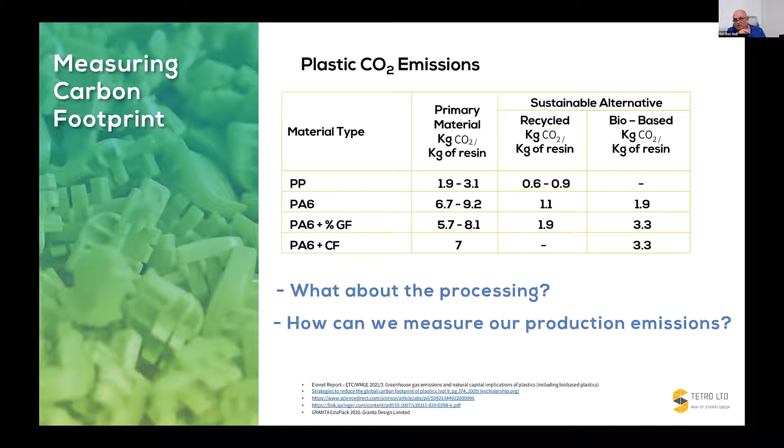How to measure the CO2 emission in our processing, how to understand, how to count, how to follow, how to compare. So all this is a very, very big challenge. And this is talking about data, data and analytics, without talking about decision making. This is a big topic to deal with.

So in general, each company needs to specify for itself the needs. Meaning, you cannot compare Tetro to another company, because Tetro is a vertically integrated company that makes everything in-house. But there are some companies that do plastic injection only. So these are different needs that a company needs to address.

And one of the good things about the real-time system that we are experiencing, which is done by Matics, is the system is open. When the system is open, you can create many features and many algorithms inside the system that can support your plan. So first of all, every company needs to specify the needs, and then consulting with Matics can build something which is more fit to the company.

So the challenge is about dealing with data. So if we talk about data, let's see what's involved in analyzing the carbon footprint. First of all, we need to connect machines to the system. Once we connect the machine to the system, we decide which signal, which data we can have in Matics, in the real-time system. And after that, we can also decide to use some energy meter, current meter in the machine, and take it also into the Matics system.

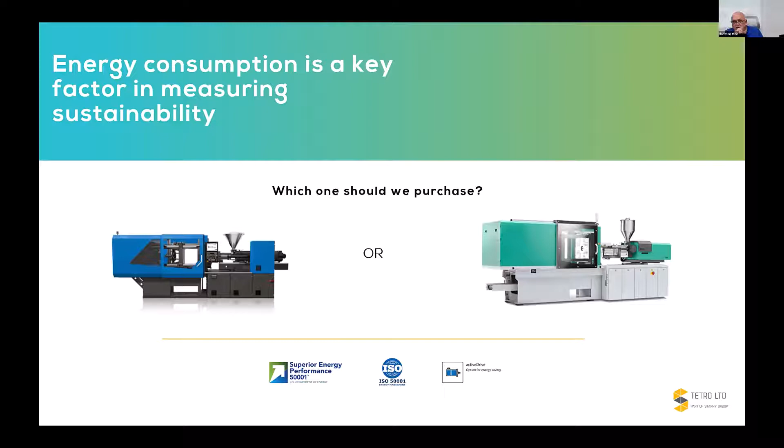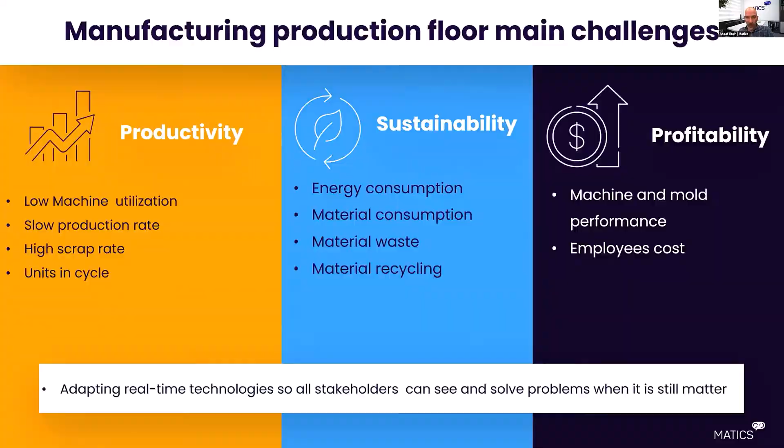Data is king, Ilan, of course, okay? The ones that are running with Excel, going with papers, they don't have the ability to track, they don't have the visibility, they don't have the ability to get insights in real time, and they don't have the ability to collaborate. And of course, call to action, being proactive, as Ilan mentioned, and this is key, okay, from reactive to proactive.

As for the challenge, we understand the challenges. The solution is to adapt real-time technologies so you can shorten the latency between an event occurring and the result. So event to visibility, step one, visibility to analysis, analysis to action, and action to result. And this one is by the Acatech Institute as well.

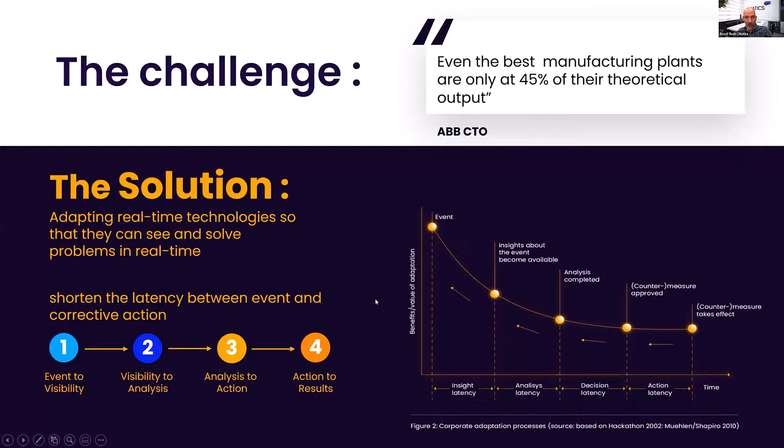Think about yourself as a manufacturer, where are you located, okay, in what stage? I can tell you that by meeting a lot of different organizations, most of them are somewhere between 1 to 3 and did not leap.

Typical use cases, as we know them, except OEE live management, which is very important. Everything needs to be in context, in the production journey. That means products and molds and the recipe and the ability to create a full digital twin that shows the real time, the real life on the production floor. Material management, energy management, quick response in terms of maintenance and remote management, collaboration. These are the most important use cases.

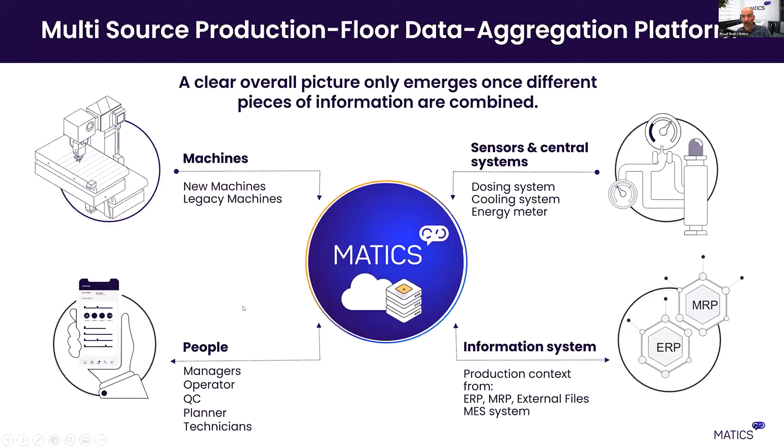So, of course, we've got information flowing from machines and from central systems and peripheral systems, and of course information systems and teams. They provide a lot of valuable information. So RTOI as a concept, okay, combines analytics with work management tools. We collect the data, we analyze the data, we visualize the data, we provide collaboration and personalized notification, and then we've got task management and process automation.

It's not enough to have data, not enough to be aware. You need to manage. You need to create a task, you need to follow, you need to create an automation that will say, okay, the task is created because something happened within the process, within the production process.

I'm gonna focus on work management tools in terms of call to action and automation. Of course, we agree that visibility 24/7 is key. You cannot do without it. And under the concept of winning the shift day in, day out, you need to go into the shift, understand where the shift goes, how the evolution of the shift looks like, and react to that. Just a few examples.

In work management tools, the first thing that we see which has great value is structured internal communication, replacing the instant messaging tool, which is not knowledge. It's instant messaging. You cannot work with it. It's not data. It's not something that you can analyze. So a machine-based communication channel in a non-hierarchical way with traceable communication between the stakeholders, and of course everything is tagged, and provides you the first step of collaboration.

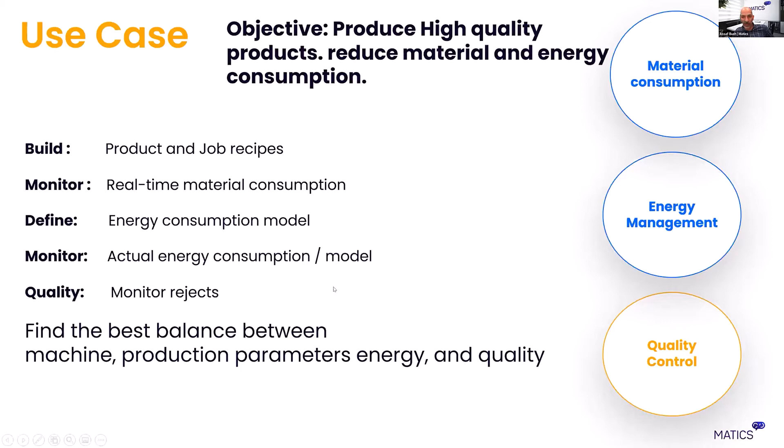Material consumption in our system: first you manage your recipe, and then you can enforce the recycled material policy. It's not enough to have a policy. You need to enforce it, and you need to check the results of introducing recycled material. And many times, although the policy stands, results show that different recycled material suppliers have different quality of the material for various kinds of use cases. So you need to track it.

You monitor your actual consumption by integrating your dosing system, and then you compare the actual versus the standard in real time in terms of material. Material overconsumption will indicate a problem. You can find it in extrusion, you can find it in blow molding. Set points that are set, that are not visible, and then you cannot act. Once you can understand, capture, and react, you reduce it. You stay at your standard.